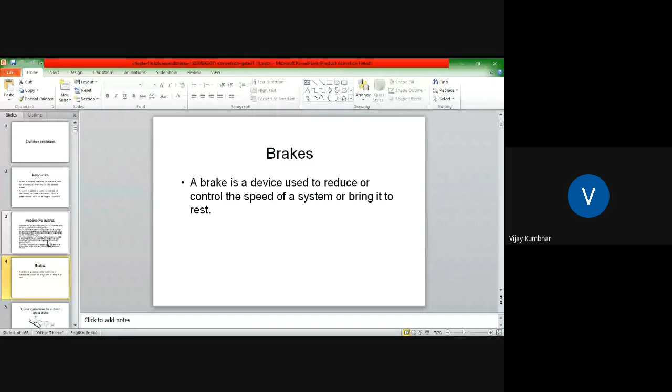As classification of clutches and brakes, they are similar devices providing a frictional, magnetic, or mechanical connection between the two components. If one component rotates and another is fixed to a non-rotating plane of reference, the device will function as a brake. And if both rotate, then it is a clutch. That is the fundamental difference between the clutch and brake we discussed earlier.

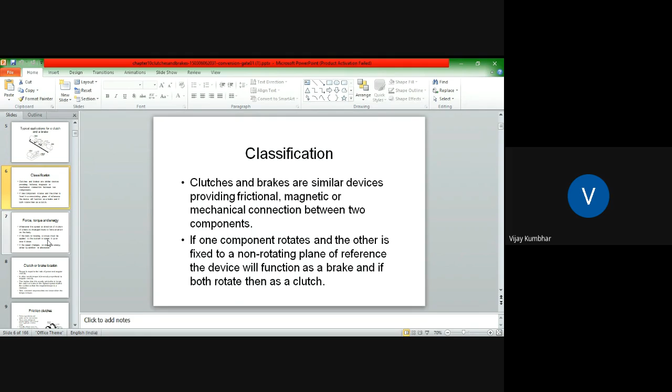At the initial condition, the clutch is always in the engaged position, but in case of brakes, whenever we are going to apply the brakes, then the brake comes into the picture, and at the end of application of the brake, both input and output shafts are stationary. But in case of clutches, whenever they get engaged, input and output shaft both are going to rotate. So this is the fundamental difference between clutch and brake.

Now, what about force, torque, and energy? What exactly do these mean? Because these terms are essential to the design analysis of brakes as well as clutches. So whenever the speed or direction of motion of a body is changed, there is a force exerted on the body, as we studied in Newton's law of motion and the dynamics part of your curriculum.

If the body is rotating, a torque must be applied to the system to speed it up or slow it down. As far as the vehicle is concerned, there is a continuous torque requirement that is continuously varying due to various resistances offered by the road and wheel. With the help of the transmission system, this torque requirement can be fulfilled. The clutch is a very important part of this transmission system, which will transfer whatever torque is developed by the engine towards the rest of the transmission system, and basically towards the wheel, or the contact point between the road wheel and road.

So if the speed changes, so does the energy, either by addition or absorption. With the help of this energy, we can speed up the vehicle, or we can say energy is utilized to change the speed from lower to higher.

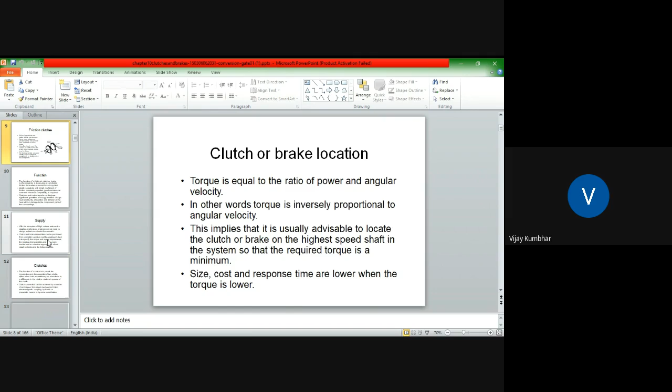We will discuss this in detail in our upcoming slides. Friction type clutches and brakes are the most common, working on the principle of friction, as we discussed earlier: two or more surfaces are pushed together with a normal force to generate a frictional torque.

Normally, at least one of the surfaces is metal, and the other high friction material is referred to as a lining. There are a number of materials that can be utilized as a lining.

The frictional contact can occur radially, as for the cylindrical arrangement, or axially, as a disc arrangement. So these clutches may be single plate, multi plate clutch, or centrifugal clutch. We are going to discuss and see a detailed classification of clutch in the upcoming slide.

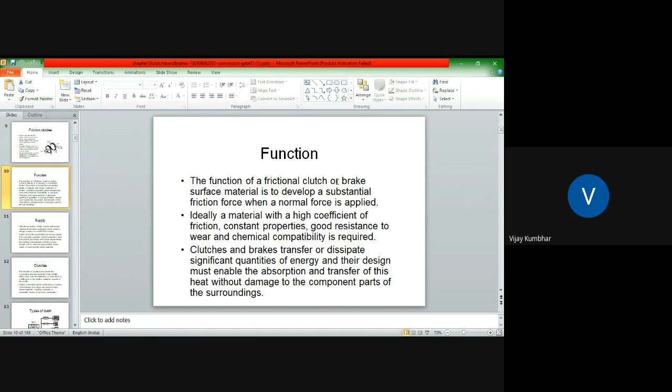Ideally, a material with a high coefficient of friction, constant property, good resistance to wear, and chemical compatibility is required for the proper application of these clutches and brakes. Clutches and brakes transfer or dissipate a significant quantity of energy, and their design must be able to absorb and transfer this heat without damage to the component parts or to the surrounding.

With the exception of high volume automotive clutches and brakes, engineers rarely need to design a clutch or brake from scratch. These engineers or designers have to select the particular clutch or brake as per application requirement, and this requirement depends on the loading characteristics of the system and the inertia. Based on that, they select the appropriately sized clutches and brakes and the proper lining material for the specific application as per requirement.

So the function of a clutch is to permit the connection and disconnection between two shafts, as when there is a relative speed between the input and output shaft.

If you see, during the starting of the vehicle, we brake, clutch, and change the gear, because at the stationary condition of the vehicle, only the engine is rotating. So as to fulfill the initial torque requirement of the vehicle, we have to apply this clutch. It will disengage the gearbox and engine, and whenever we apply the first gear, we slowly release the clutch so as to engage the engine and gearbox again, to transmit the required torque to the wheel.

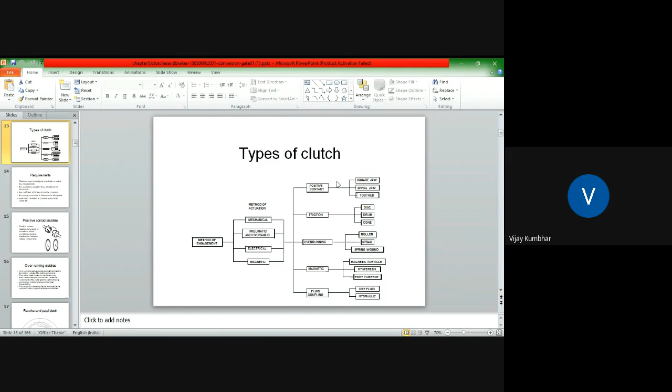So there are certain requirements of clutches. The necessity of actuation force must not be excessive—that is, ease of operation. Then the coefficient of friction should be constant and should not change with heat. As the heat increases, there are chances of reduction of the coefficient of friction, but it should not affect the coefficient of friction.

This property of the clutch is called the anti-fade characteristic of the clutch, so it should possess good anti-fade characteristics. Then the energy converted to heat must be dissipated, and wear must be limited to provide a reasonable clutch life.

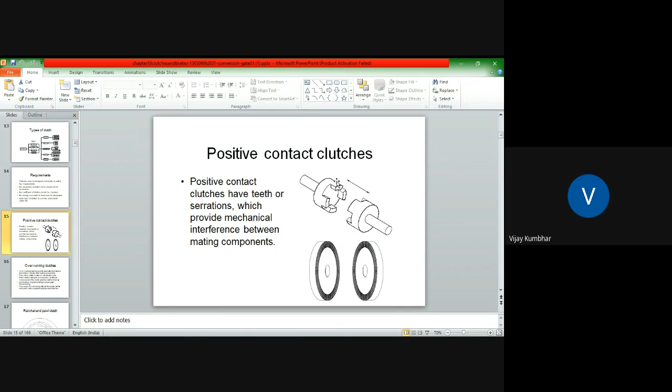Clutches engage at some critical value. Friction elements are forced radially outward to engage against the inner radius of a mating cylindrical drum. Common applications of centrifugal clutches include chainsaws, overload releases, and go-karts.

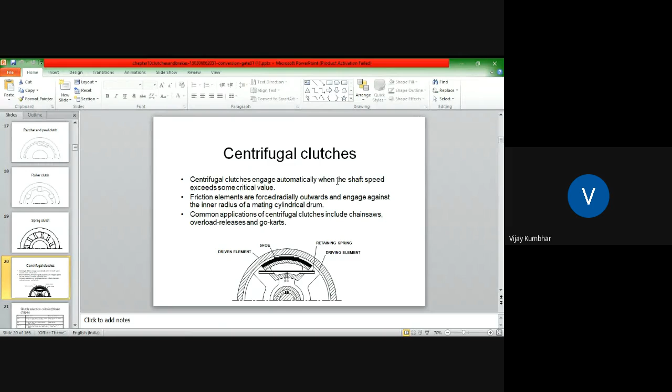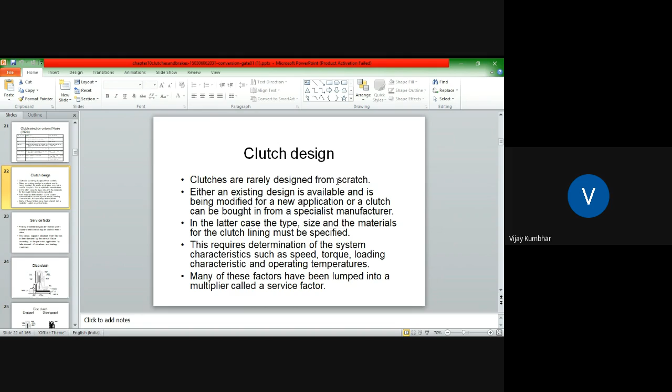And according to this, we consider the service factor, which is nothing but the factor of safety.

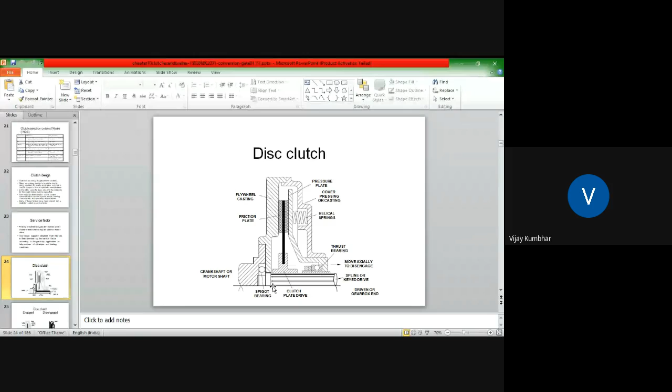There are various types of springs that can be utilized, like diaphragm spring, etc. As per requirement, in case of diaphragm spring, equal pressure can be applied throughout the periphery of this clutch plate. But in case of helical spring, there may be 3 to 4 springs in number as per the size of this clutch unit.

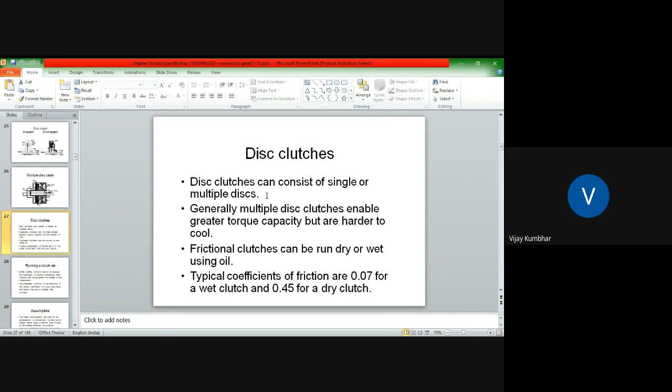These are some certain standard values. While designing, we have to take these values into consideration.

If you see, this is a running clutch wet. While running a wet clutch in oil, it reduces the coefficient of friction, but enhances the heat transfer and potential for cooling of the components. So the expedient solution for this reduction in friction coefficient is to use a number of discs, hence the multiple disc clutches. We have to use a number of friction clutches.

So regarding torque transmission capacity, there are a number of factors on which the torque transmission capacity of this plate depends. That is, effective radius of this frictional disc will be there. Then F, the clamping force, is also an important factor, and the number of frictional surfaces are important parameters which affect the torque transmission capacity.

So while designing the clutch, there are certain assumptions. These assumptions for designing this disc clutch mean generally these clutches can be designed on the basis of two theories: one is the uniform pressure theory and the uniform wear theory. You might have studied this in your machine design course.

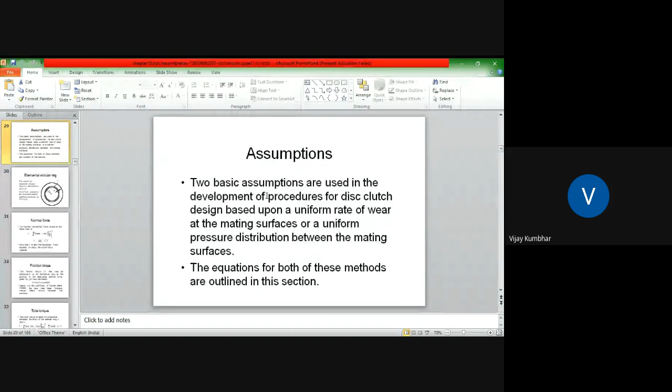So if you see, this is an elemental annular ring. You select a small area of this friction plate having thickness delta r, located at a position of small r from the center point of this friction plate. So the elemental area, this very small annular section we have selected, or annular ring, can be calculated as delta A equals 2 pi r into delta r.

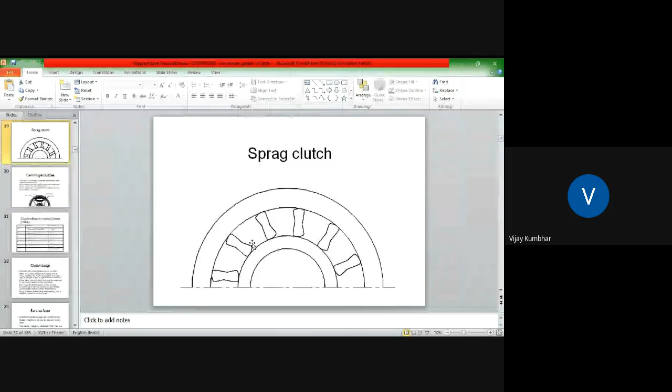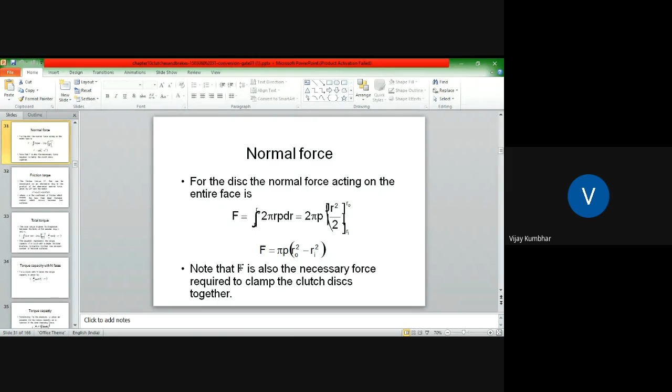So the friction torque delta T that can be developed on the elemental ring is the product of elemental normal force by mu into delta F and the radius. As we know, torque is equal to force into perpendicular distance. So the torque acting on this elemental area or annular ring can be calculated as delta T is equal to R into mu into delta F, which is equal to 2 into mu into pi into r square into P into delta R, where mu is the coefficient of friction which models the less than ideal friction contact which occurs between the two surfaces.

Then this total torque can be calculated by integrating this torque equation from Ri to Ro. So we get the integration of Ri to Ro of 2 pi mu into r square P into dr, which is equal to 2 pi P mu r cube divided by 3, evaluated from Ri to Ro. By simplification, we get 2 divided by 3 pi into P into mu into Ro cube minus Ri cube.

So this equation represents the torque capacity of the clutch for a single frictional surface area. If you increase the number of frictional surface areas, there is an increase in the torque transmission capacity of that particular clutch. So if you see the torque transmission capacity with n number of surfaces, it can be given as T is equal to 2 by 3 into pi P into mu into n into Ro cube minus Ri cube.

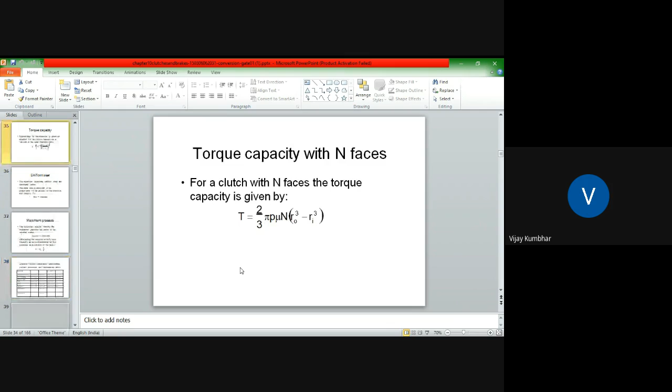Substituting for the pressure P gives an equation for torque capacity as a function of axial clamping force. So capital T is equal to 2 by 3 into mu into F into n into Ro cube minus Ri cube divided by Ro square minus Ri square. This is the common equation utilized to calculate the maximum torque transmission capacity. So the most important parameters are clamping force, internal radius, outer radius, as well as number of frictional surfaces and coefficient of friction between these.

So this is the torque transmission capacity, or the maximum torque transmission capacity that can be calculated from these clutches. As we earlier discussed, these clutches can be designed on the basis of uniform pressure theory and uniform wear theory.

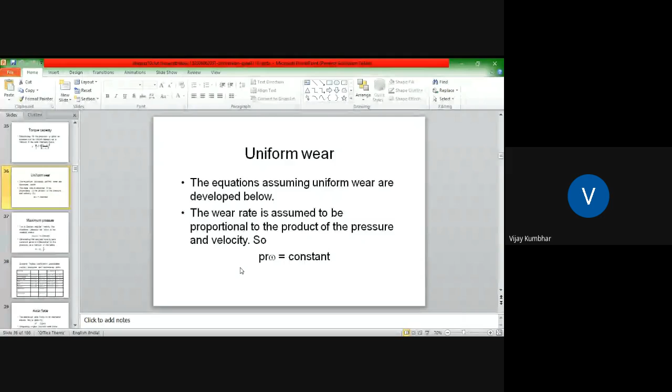So if you see the uniform wear theory, the equations assume uniform wear developed. The wear rate is assumed to be proportional to the product of pressure and velocity, so P into R into R omega is a constant. Again, if you see the maximum pressure for a constant angular velocity, the maximum pressure will occur at the smaller radius, so P max into Ri omega is equal to constant. So eliminating the angular velocity and relating pressure as a function of radius, we get P is equal to P max into Ri upon R.

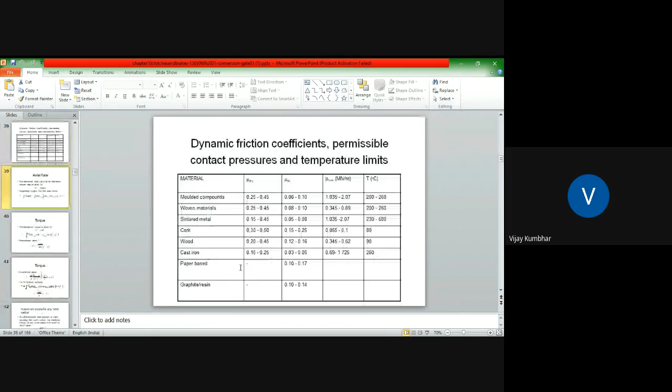Again, axial force can be calculated for uniform wear theory. The delta F is equal to 2 pi into PR into delta R. Again, integrating this equation from Ri to Ro, 2 pi P into RdR. Again, after simplification, we get 2 pi into P max into Ri into Ro minus Ri.

The elemental torque is given by delta T is equal to mu R into delta F. Then capital T, or total torque transmission, is given by integrating 2 pi mu P max Ri R dR from Ri to Ro, which equals P max mu pi into Ri, Ro square minus Ri square.

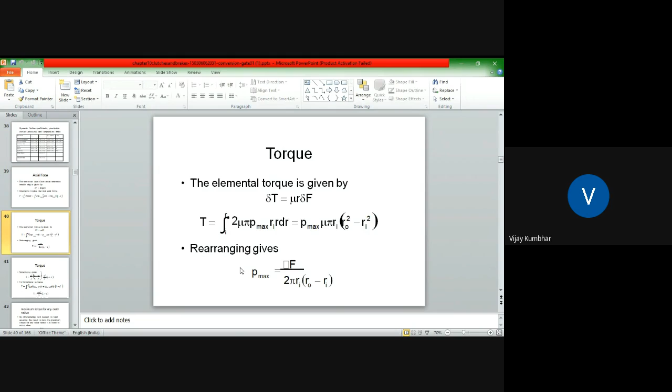By rearranging terms, we get the equation F divided by 2 pi Ri, Ro minus Ri. Substituting this value, capital T is equal to mu F divided by 2 into Ro plus Ri, for number of frictional surfaces.

As the number of frictional surfaces increases, this is based on the wear theory, uniform wear theory. Capital T is equal to mu into Nf divided by 2, Ro plus Ri.

If you see the design equation for maximum torque transmission capacity for both assumptions, uniform pressure theory and uniform wear theory: in case of uniform pressure theory, the transmission capacity can be calculated as 2 by 3 mu into Nf into Ro cube minus Ri cube, divided by Ro square minus Ri square.

And in case of uniform wear theory, capital T is equal to mu into N into F divided by 2, Ro plus Ri.

So the factors affecting this maximum torque transmission capacity of this clutch can be considered as: coefficient of friction mu, N and F, where N is the total number of frictional surfaces and F is the clamping force. Ro is the outer radius and Ri is the internal radius.

So maximum torque for any outer radius - how do we decide the Ri value or Ro value while designing the clutch? By differentiating with respect to Ri and equating the result to zero, the maximum torque for the outer radius Ro is found to be when Ri is equal to root of 1 by 3 Ro. This is a very useful formula, used to set the inner radius when the outer radius is constrained to a particular value. This is a very important parameter while selecting a particular design of this clutch.

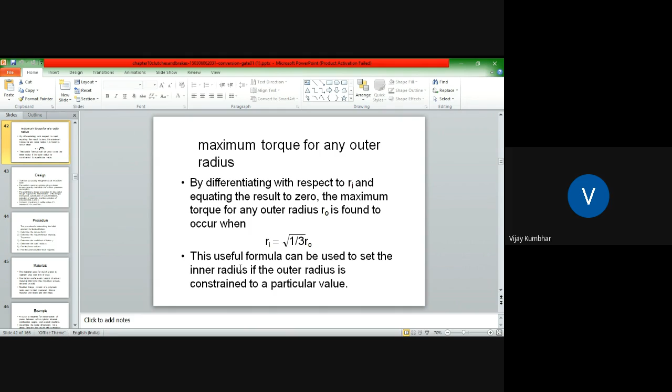If you see, this is the design of a clutch. Clutches are usually designed based on the uniform wear theory. The uniform wear assumption gives a lower torque capacity clutch than the uniform pressure assumption.

So the preliminary design procedure for this clutch design requires determination of torque and speed, specification of space limitations, selection of material, and selection of principal radii Ro and Ri. Common practice is to set the value of Ri in between 0.45 Ro to 0.8 Ro.

After that, there is a procedure to select: first, you have to determine the service factor, then determination of required torque capacity which is equal to power divided by omega, then determination of coefficient of friction, then determine the outer radius Ro and the inner radius Ri, and the axial actuation force required.

So this is the standard procedure through which we can design, or select a particular clutch, or calculate whatever parameters related to the clutch as per the application requirement.

As far as material is concerned, the material used for clutches is typically grey cast iron or steel clutch plate. The friction surfaces consist of a lined material which may be molded, woven, sintered, or solid. Molded lining consists of polymeric resin used to bind fibrous material and brass and zinc chips.

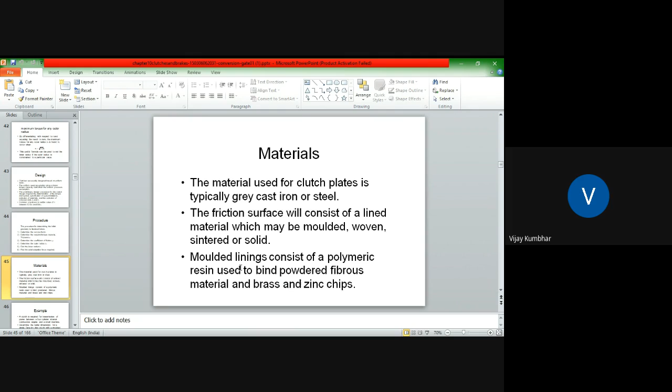Because if you consider the requirement, inertia is the most important component. Thus, to maintain sufficient inertia, the utilization of proper material is very important.

If you see the example of this clutch design: a clutch is required for transmission of power between a four-cylinder internal combustion engine and a small machine. Determine the radial dimension for a single face dry clutch with a molded lining which permits 5 kW power at 1800 rpm. Base the design on the uniform wear theory.

So, on the uniform wear assumption, or on the basis of uniform wear theory, we have to design the clutch, and only a single frictional surface area will be there. You can see this is one input shaft, which comes from the engine, and this is the output shaft, which will go towards this particular machine operation. So the first step is we have to select the service factor.

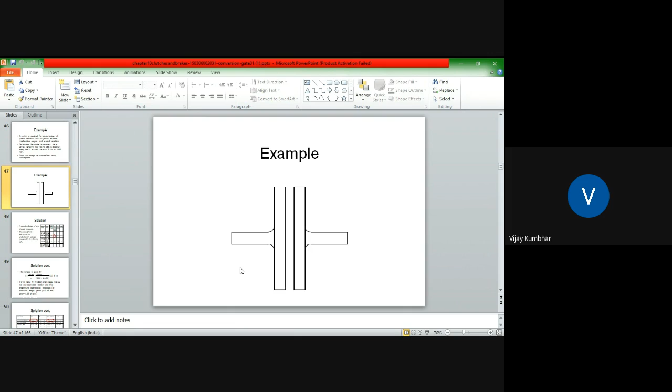From the standard table, we have to select the service factor. A service factor of 2 should be used. The design will therefore be undertaken using a power of 2 into 5 kilowatt, giving 10 kilowatt. There are certain types of reserve strength that can be provided for any design, and we generally select the factor of safety as a reserve strength. So for this, we selected this service factor. The application requirement is 5 kilowatt, but we design by selecting the service factor as about 10 kilowatt.

If you see the solution, the torque transmission can be calculated as power divided by omega. From this equation, we calculated the torque requirement, or the torque we have to transmit, which is about 53 Newton meter.

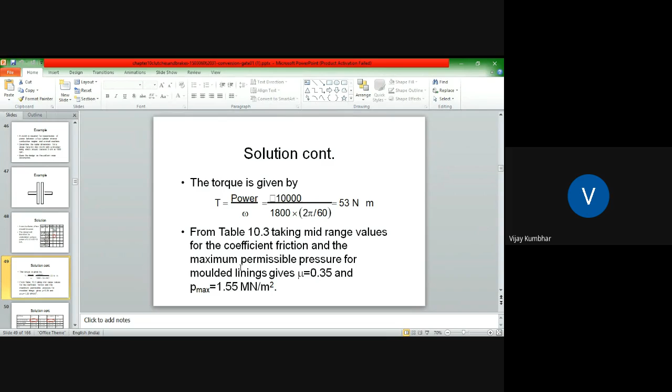From the table where material and provision of friction for dry as well as wet application were shown, we select the material as well as the coefficient of friction. We selected the coefficient of friction mu equal to 0.35, and the maximum applicable pressure P max is about 1.55 meganewton per meter square. You can see this value we selected for this molded component, and this P max is in meganewton per meter square.

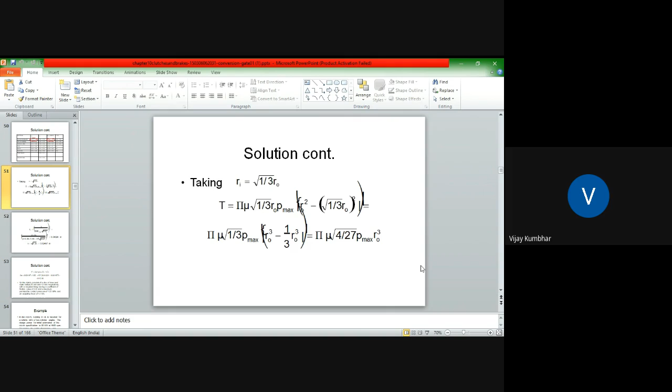The next step is calculation of Ri. As we earlier saw, for this particular value we get the maximum torque transmission capacity. Ri can be calculated as the under root of 1 by 3 into Ro. From this we can write capital T equal to pi into mu into square root of 1 by 3 Ro, P max into Ro square minus 1 by 3 Ro bracket square. This can be written as pi into mu into square root of 1 by 3 P max Ro cube minus 1 by 3 Ro cube, which equals pi into mu into 4 by 27 P max Ro cube. After simplification of this equation, we get the value of Ri equal to 0.024997.

Then we have to calculate the clamping force, F equal to 2 pi n Ri P max into Ro minus Ri. So in that, this clamping force is about 4,443 Newton.

So the clutch consists of a disc of inner and outer radius of 25 and 43 mm respectively, with a molded lining having coefficient of friction about 0.35, and a maximum permissible contact pressure of about 1.55 MPa, and the actuating force is 4.4 kilonewton. This is the simple example by which this clutch can be designed, showing the procedure and steps we have to follow for the design of any clutch.

First we have to select the service factor, and according to the service factor, we select the material for the friction lining, as well as the coefficient of friction and the P max for this particular application. After that, we calculate the value of Ri from the standard equation, Ri equal to square root of 1 by 3 into Ro. Then we calculate the value of Ri and Ro, and after that the clamping force, inner and outer radius. This is the standard procedure or steps that can be followed to design any clutch.

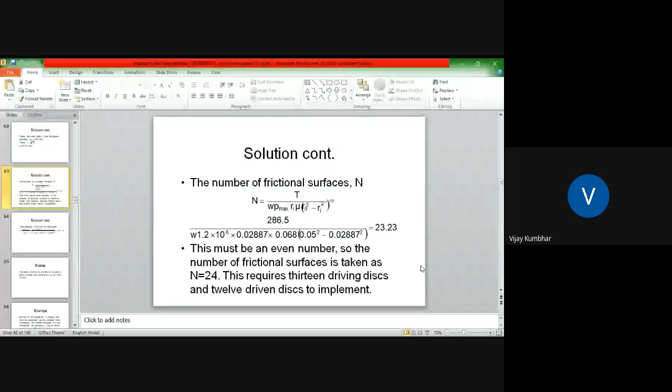If you see the brakes, the basic function of brake is to absorb the kinetic energy and dissipate it in the form of heat. The function of brake is to completely stop the vehicle or machine, or reduce the speed of that particular machine. In the case of automotive or vehicle, we have to maintain the position of the vehicle when it is in the parking condition, or when the vehicle is going to park. At that time, the brake has to maintain the position with the help of the parking brake, or handbrake.

If you see the example, an idea of the magnitude of energy that must be dissipated can be obtained by considering the familiar example of a car undergoing an emergency stop in 7 seconds from 60 miles per hour, that is 96 kilometers per hour. So, as far as the solution is concerned...

The car mass can be considered as 1,400 kg, and assuming 65% of car weight is loaded onto the front axle during rapid braking, then the load on the front axle can be calculated as 1400 into 9.81 into 0.65.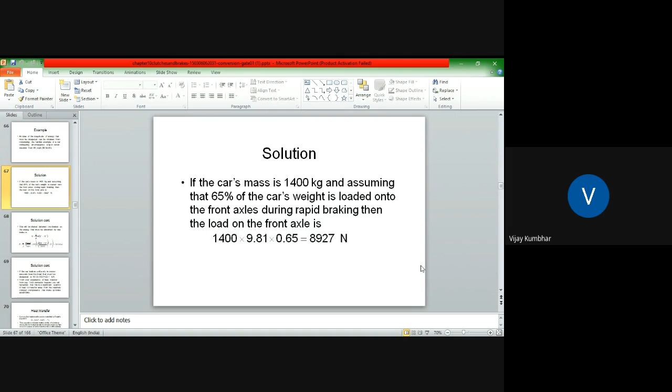So the loading after braking on the front axle is calculated as 8927 Newton. The two brakes will share this load. The energy that must be absorbed by one brake can be calculated as E equals 1 by 2 into M into V1 square minus Vf square. Putting in these values, we get E equals 161.8 kilojoule.

If the car brakes uniformly in 7 seconds, then the heat that must be dissipated can be calculated as 161.8 into 10 cubed by 7, which is equal to 23.1 kilowatt. From your experience of heat transfer, say a 1 kilowatt domestic heater, you will recognize that this is a significant quantity of heat transfer away from the relatively compact components that make up the brake assembly.

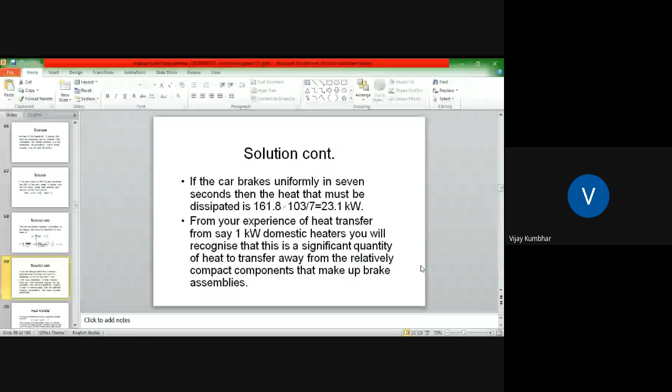If you see the classification or types of brakes, according to methods of engagement: mechanical, pneumatic and hydraulic brake, electrical brake, automatic brake. Then friction brakes: drum brakes, disc brakes. In drum brakes, there are short shoes, long shoes, band brake. In case of disc brake, caliper disc, full disc. Then magnetic, which can be electrically on or electrically off. These are certain types of brakes.

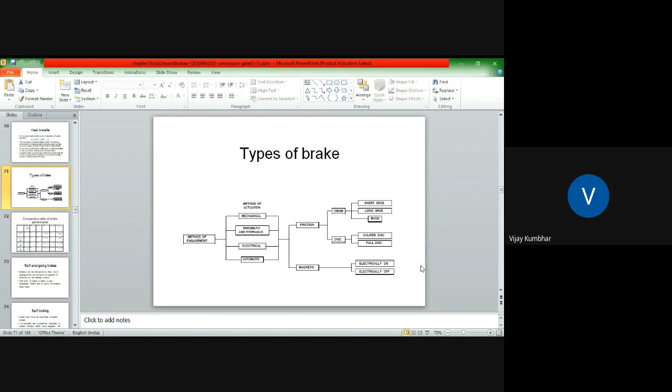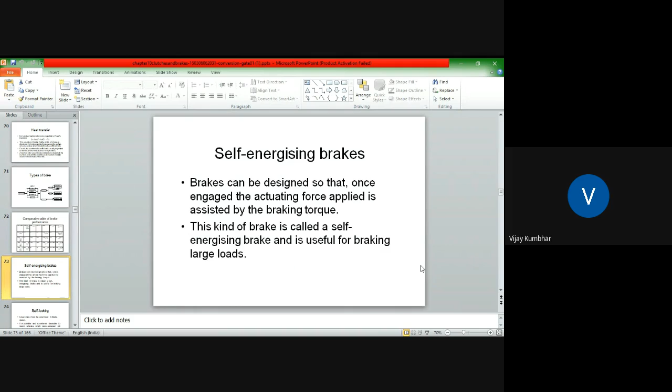This self-energizing brake can be designed so that once engaged, the actuating force applied is assisted by the braking torque. This kind of brake is called a self-energizing brake and is useful for braking large loads. Another type is self-locking, so great care must be exercised in the brake design. It is possible, and sometimes desirable, to design a brake in which once engaged, it will grab and lock up. This is called self-locking.

So this is the torque transmission capacity. Capital T is equal to mu into F into Re, where Re is the effective radius, and you can see theta is there. Circular pad and annular pad is there. So clamping force is capital F, and according to size of this.

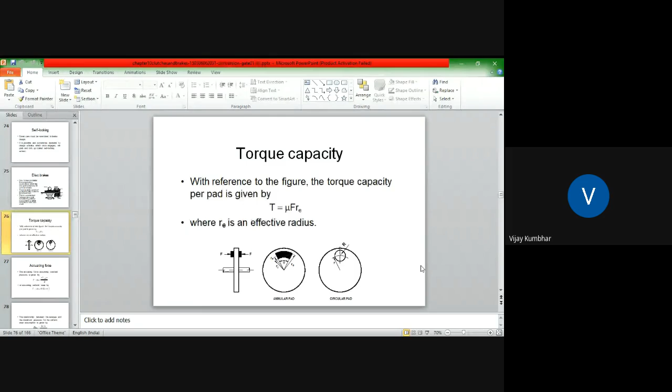The relationship between the average and maximum pressure for the uniform wear assumption is given by P average divided by P max is equal to 2 Ri divided by Rho, divided by 1 plus Ri upon Rho.

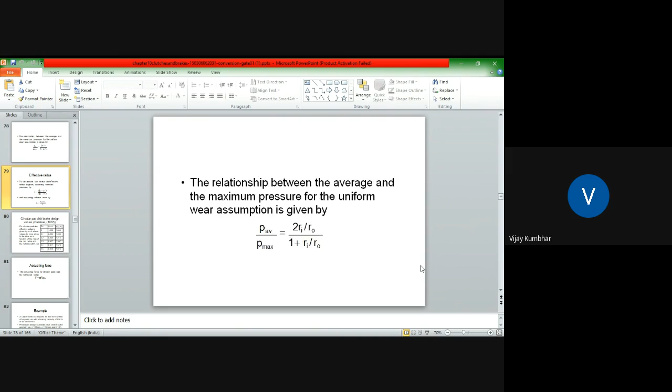So circular pad disc brake design values, you can see this is some standard values that can be utilized for the designing of the brakes. For circular pad, the effective radius is given by Re is equal to R into delta, where the values of delta are given in the table as a function of ratio of pad radius as well as radial location, that is capital R to small r.

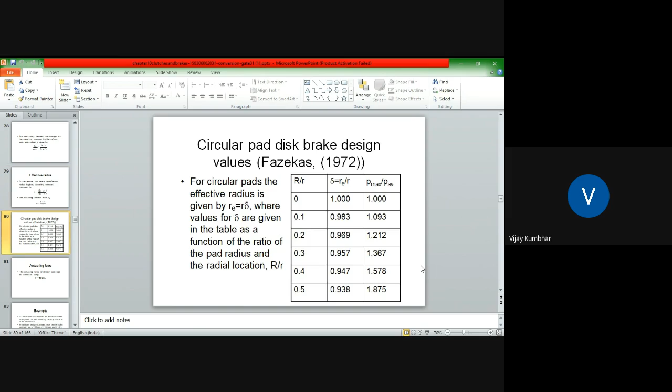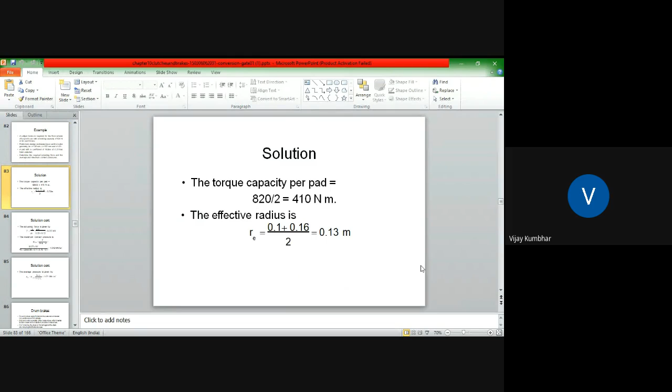And effective radius can be calculated by using this uniform wear theory. This Re effective radius is the average of these two radii, that is Ri and Ro. So this can be calculated as 0.1 plus 0.16 divided by 2, is equal to 0.13 meter.

So the actuating force is given by capital F is equal to capital T divided by mu into Re. So this will be 9.002 kilonewton. Maximum contact pressure can be calculated for this particular example as 1.912 meganewton per meter square.

So the average pressure can be calculated as P average is equal to P max into 2 Ri divided by Rho, divided by 1 plus Ri divided by Rho. It can be 1.471 meganewton per meter square. So this is the design process for simple design of this caliper.

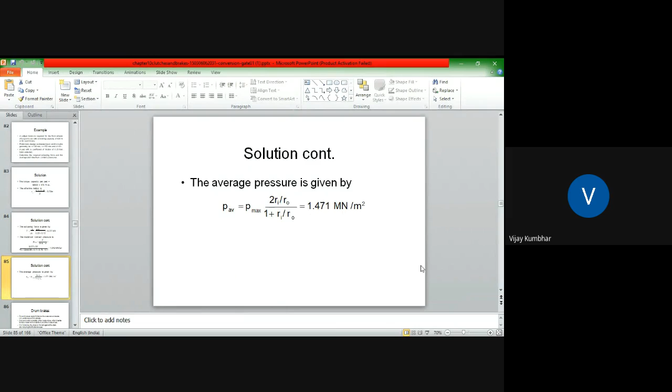I'm not going to discuss all the examples of the design of all types of brakes, but just brush up the things related to other types of brakes also, like drum brake. You can see this is the drum brake. Drum brake applies friction to the external or internal circumference of the cylinder.

These brakes are generally internal expanding brakes. So the drum brakes consist of the brake shoe which has the friction material bonded to it, and the brake drum. So the brake shoe is forced against the drum, developing the friction torque.

Drum brakes can be divided into two groups depending on whether the brake shoe is external or internal to the drum. Further classification can be made in terms of length of brake shoe: short, long, and complete band.

Then short and long shoe internal drum brakes. Short shoe internal brakes are used for centrifugal brakes that engage at a particular critical speed. Long shoe internal brakes are used principally in automotive applications.

If you see the calipers used in case of any vehicle, this drum brake, or you can say internal expanding brake, the arc of contact between the brakes wholly covers the drum, and there will be two calipers.

So drum brakes can be designed to be self-energizing. The actuating force can be assisted by this braking torque in case of these self-energizing brakes. Once engaged, the friction force increases and normal force non-linearly, so the increase in friction torque has a positive impact.

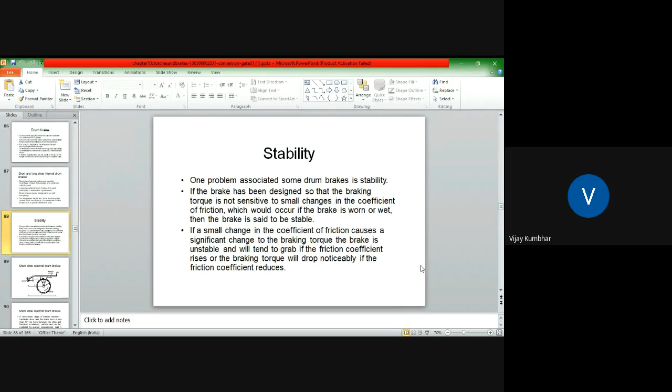As the friction material is considered, if there is an increase in heat, there is a change in the coefficient of friction, so it must possess anti-fade characteristics like in clutches as well as brakes. If a small change in the coefficient of friction causes a significant change in braking torque, the brake can be unstable and will tend to grab as friction coefficient rises, or the braking torque will drop noticeably if the friction coefficient reduces. So stability is the most important part of this braking system.

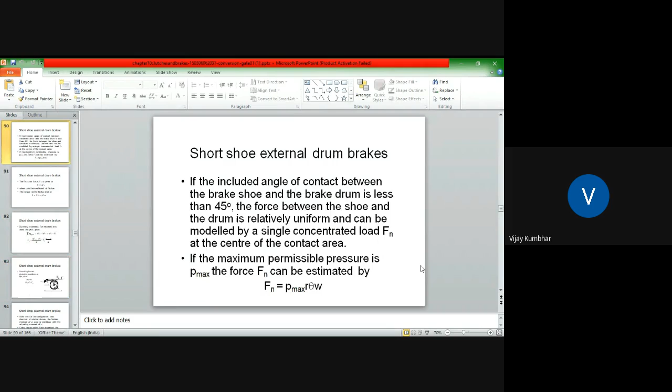Then the frictional force can be calculated as Ff equals mu into Fn, and then the torque can be calculated as Ff into R, that is mu into Fn into R.

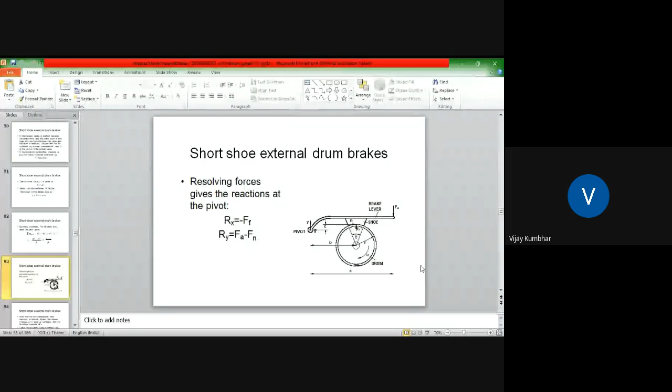In case of this short external drum brake with the pivot, if you calculate the moments or reactions, we get Rx equals minus Ff, and Ry equals Fa minus Fn.

One important thing is that depending on the configuration and direction of rotation, mu Fn C adds or combines with the actuating force A into Fa. Once the actuating force is applied, the friction generated at the shoe acts to increase the torque. This kind of braking action is called self-energizing.

So for short shoe external drum brakes, if the brake direction is reversed, the friction moment mu Fn into C becomes negative, and the applied force Fa must be maintained to generate a braking torque. This combination is called self de-energizing.

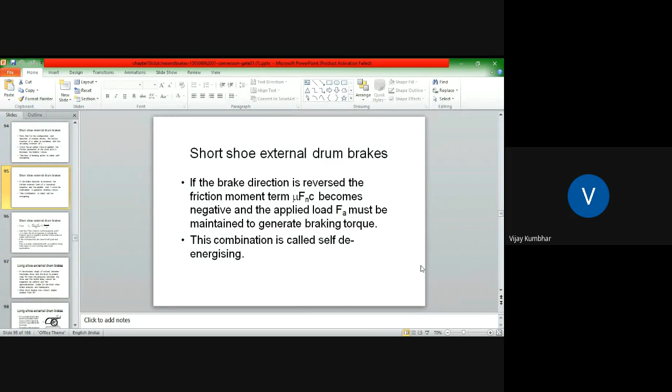If the brake is self-energizing and mu C is greater than B, then the force required to actuate the brake is zero or negative, and the brake action is called self-locking. If the shoe touches the drum, it will grab and lock. This is usually undesirable, with the exception of hot stops and overrunning clutch type applications.

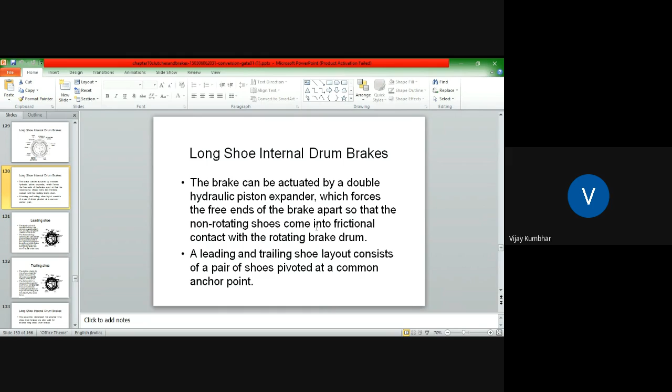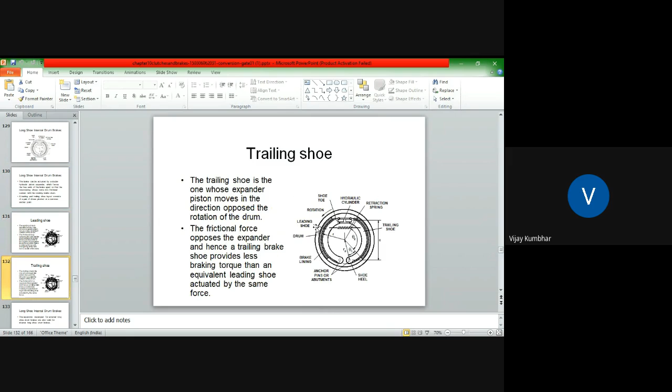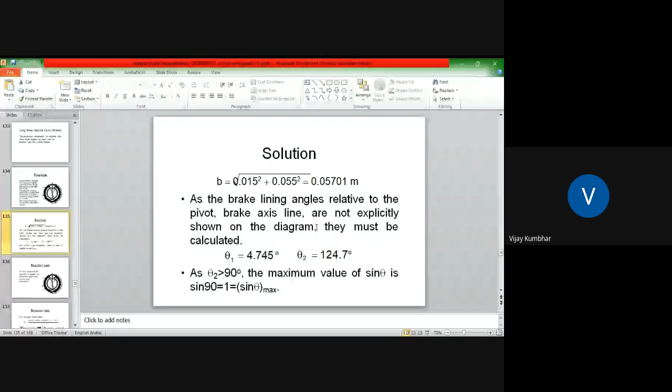As the angles the brake axis are not explicitly shown, first calculated, and theta 2 is 124.7 degree. As theta 2 is greater than 90 degree, the maximum value of sin theta is 1. Sin 90 is equal to 1.

Then from this equation we calculate the actuating force F is equal to Mn minus Mf divided by A. This is 938.9.

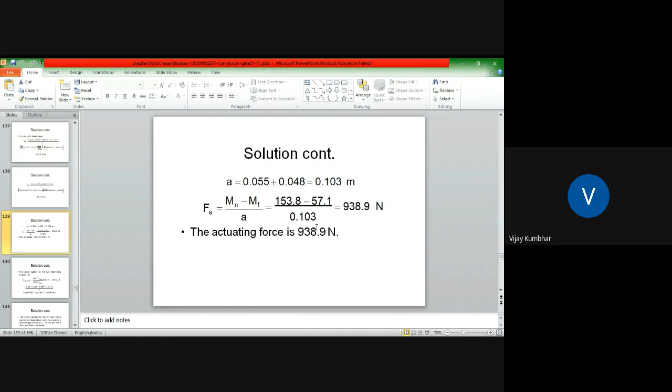Then torque applied by the right hand shoe is given by T right shoe equal to mu into W R square P max divided by sin theta into cos theta 1 minus cos theta 2. After calculation, we get the value of T right shoe equal to 69.54.

And the torque applied by the left hand shoe cannot be determined until the maximum operating pressure P max for the left hand shoes has been calculated.

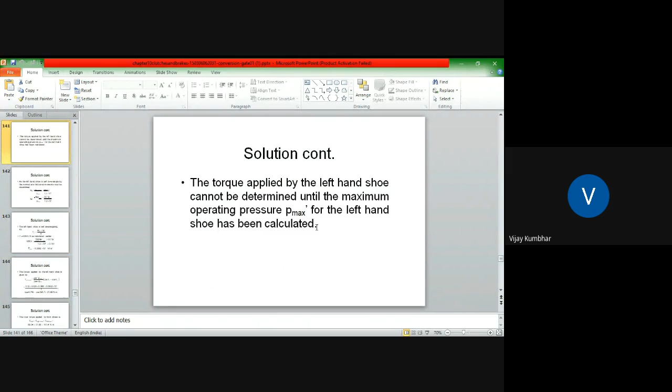So for this left hand, you can see the value of Mn and Mf. And after that, the value of Fa, the actuating force, can be calculated as 938.9. So after simplification, we can calculate the value of P max is equal to 0.5502.

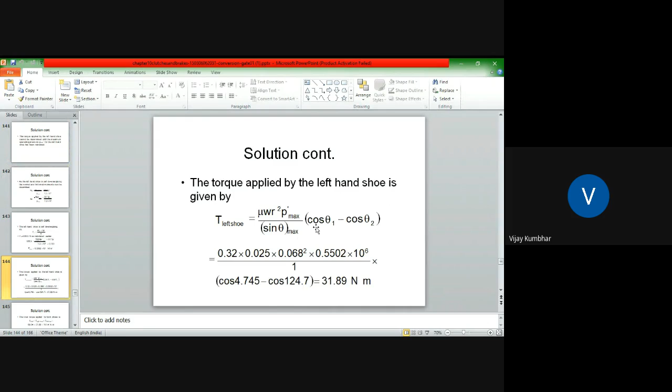And torque transmitted by this left shoe can be calculated with the help of this equation, mu into W into R square P max divided by sin theta max into cos theta 1 minus cos theta 2, and it can be calculated as 31.89 Newton meter.

So total torque applied, T total is equal to T right shoe plus T left shoe, and this is 101.4 Newton meter.

If you see again this band brake, one of the simplest type of braking device is band brake. This consists of a flexible metal band lined with friction material wrapped partly around the drum. The brake is actuated by pulling the band against the drum. This is the band brake.

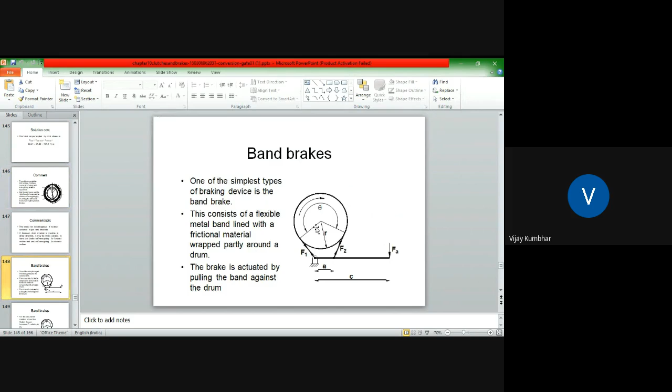This discussion has concentrated on rotating clutches and brakes and specifically on the design of friction-based devices. Again, detailed design of clutch braking system involves the integration of a wide range of skills such as bearing, shaft, splines, teeth, flywheel, casings, frictional surfaces, hydraulics, sensors, and control algorithms.

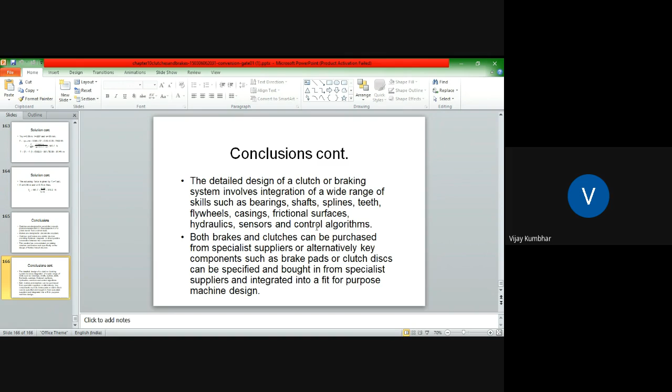Both the brakes and clutches can be purchased from specialist suppliers, or alternatively key components such as the brake pads or clutch discs can be specified and bought in from specialist suppliers and integrated into the fit-for-purpose machine design. So this is what about the clutch and brake design.

So the common working principle of this clutch as well as brakes is friction. Working principle is friction, or we can say both of these work on the principle of friction.

Now we are moving towards the bearing part, the next part is bearing.

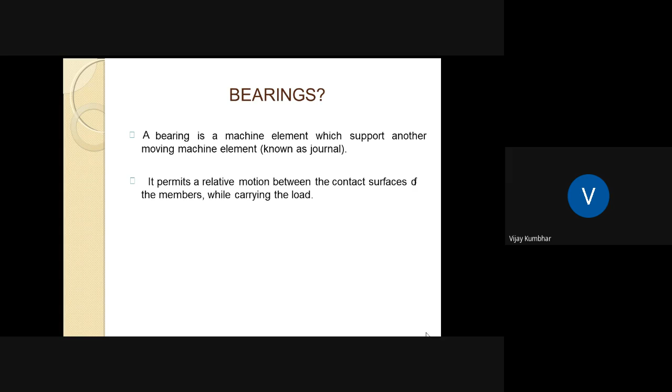What is a bearing? A bearing is a machine element which supports another moving machine element, called a journal. It permits relative motion between the contact surfaces of the members while carrying load. I'm not going to discuss too much because you might already be aware of these things from machine design.

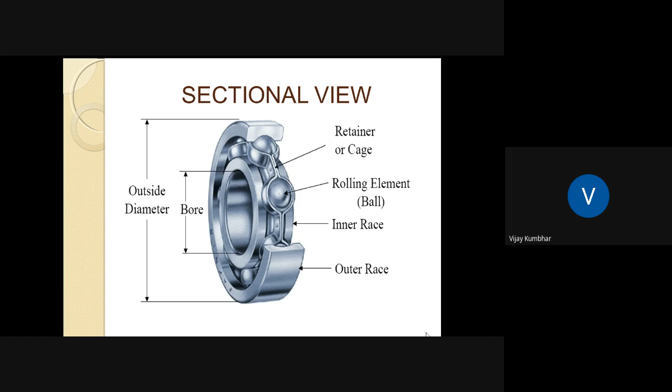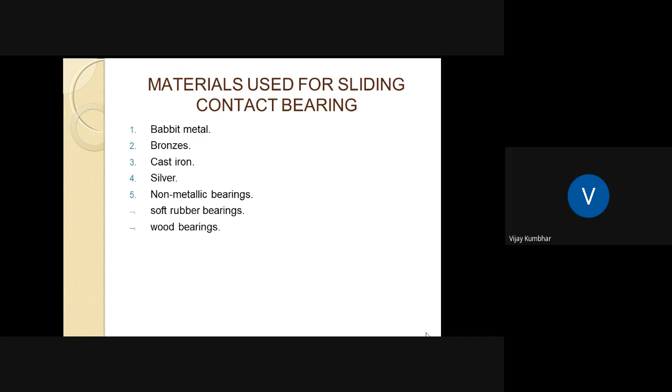The properties of sliding contact bearing materials are compressive strength, fatigue strength, conformability, embeddability, bondability, corrosion resistance, thermal conductivity, and thermal expansion. As for materials, there are babbitt metal, bronzes, cast iron, silver, non-metallic materials, soft rubber bearings, wood bearings. This is the material and their properties.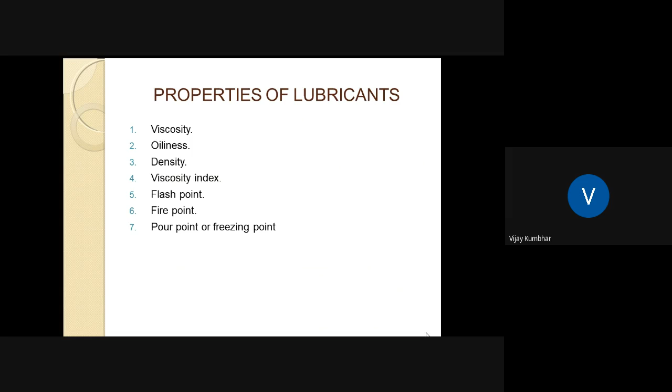As for properties of lubricant: viscosity, oiliness, density, viscosity index, flash point, fire point, then pour point or freezing point.

Lubricants utilized for bearings are liquid oil, semi-liquid greases, and solid. As a classification, bearings are radial bearing and thrust bearing. Again, depending upon the nature of contact, sliding contact and rolling contact bearing.

These are types of bearings: plain bearing, rolling element or anti-friction bearing. On the basis of area of contact: journal bearing, guide bearing, thrust bearing or tilting pad, axial load. Again, journal bearing can be classified as solid, split bearing, half bearing, tilting pad, cylinder, and rider ring, etc.

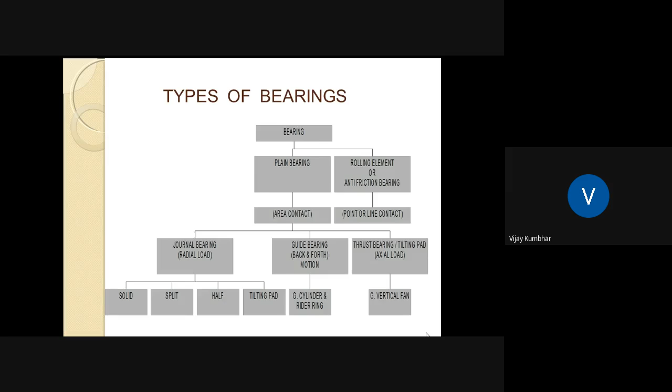If you see this, there is point contact and line contact. In case of point contact: less area of contact, less friction, more speed and less load. In case of line contact: more area of contact, more friction, less speed and more load.

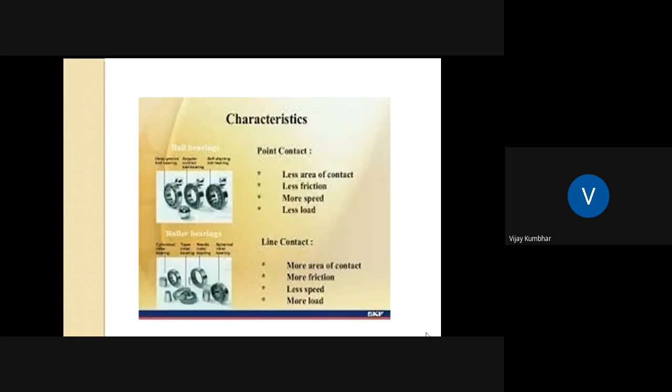Plain bearings are also called bushing, journal bearing, sleeve bearing, or rifle bearing. As for anti-friction bearings: ball bearing, radial ball bearing, angular contact ball bearing, roller bearing, cylindrical roller bearing, taper roller bearing, spherical roller bearing, needle roller bearing. Then forces acting on the bearing: axial and radial load, and a combination of both axial and radial.

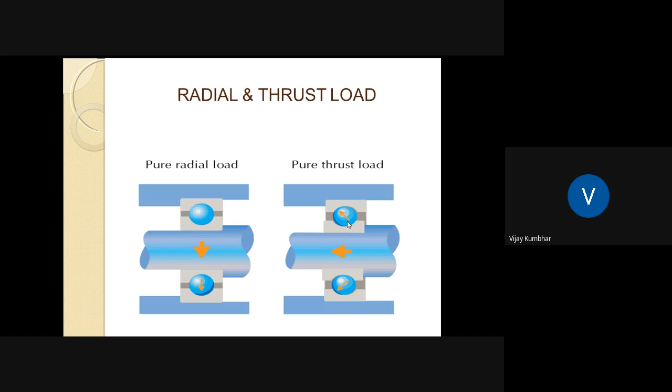In case of pure radial load, and if you see this is a thrust load, part of the load can be taken by this ball, and this part of the load can be taken radially.

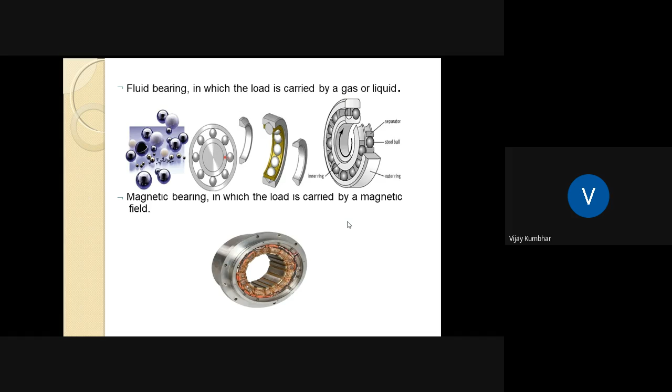Some more types: a jewel bearing in which the load is carried by rolling the axle slightly off center. Fluid bearing in which the load is carried by gas or liquid. Magnetic bearing in which the load is carried by a magnetic field. Flexure bearing in which the motion is supported by the load element which bends.

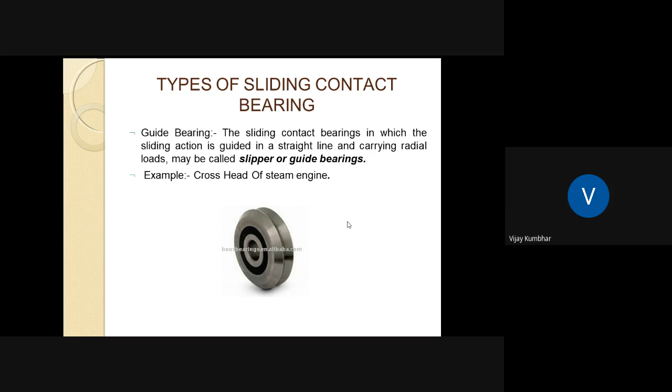If you see the types of sliding contact bearings, there is guide bearing, a sliding contact bearing in which the slide action is guided in a straight line and carries radial loads, may be called a slipper or guide bearing. Example: the cross head of a steam engine.

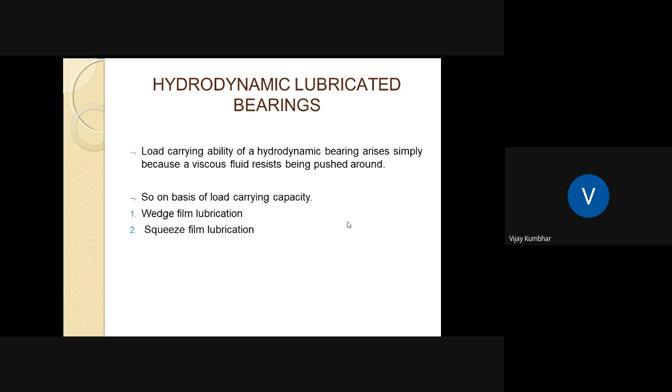In certain cases, the bearing oscillates or rotates so slowly that the oil film cannot provide satisfactory film thickness. If the load is uniform or varying in magnitude while acting in a constant direction, this becomes a thin film or possibly zero film problem. But if the load reverses its direction, the squeeze film may develop sufficient capacity to carry the dynamic loads without contact between the journal and the bearing. Such a bearing is called a squeeze film bearing.

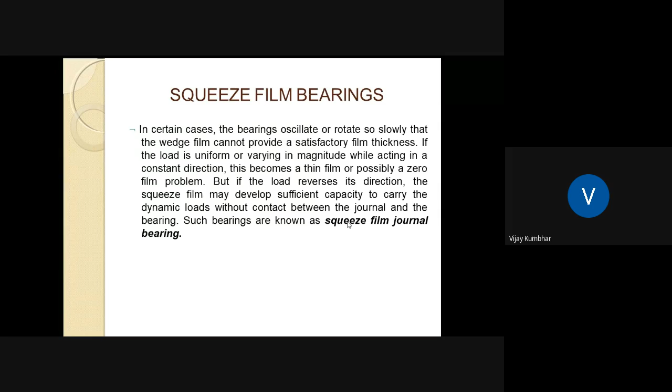It can be a bearing of the same size, and you might be aware about the rated life of the bearing. L10 life is the life at which 10% of bearings being tested would fail before the rated number of revolutions of the inner race at the rated speed.

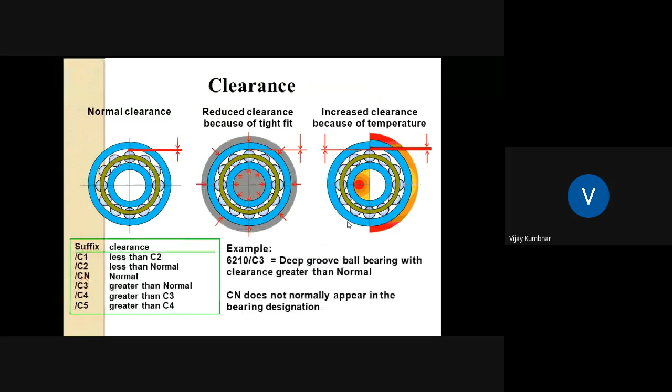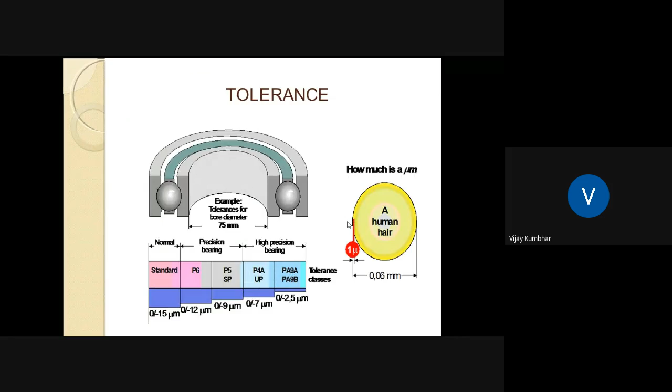For the design consideration of these bearings, first we determine the ratio L by D. Then check the bearing pressure, which is near about W divided by L into D. Then assume the lubricant forms a stable operating temperature T0. This temperature should be between 26.5 degrees Celsius and 60 degrees, with 82 degrees Celsius as the maximum for high temperature installations such as steam turbines.

Then assume the clearance ratio C by D from the table. Then determine the coefficient of friction by using the relation mu equals 33 divided by 10 raised to 8, times Zn divided by P into D by C, plus K.

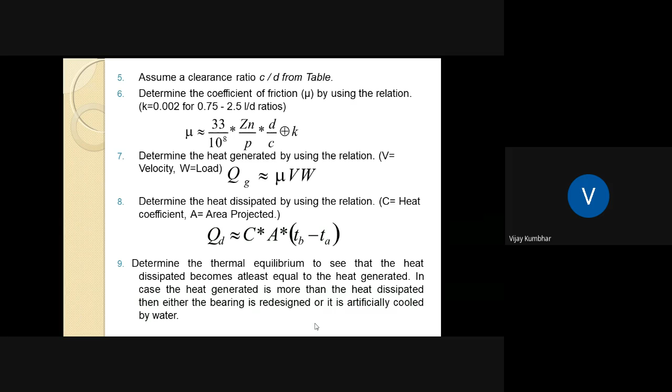Determine the heat generated using the relation Qg is nearly about mu into V into W. Then determine the heat dissipation using the relation Qd equals C into A into Tb minus Ta. Then determine thermal equilibrium to see that the heat dissipated becomes at least equal to the heat generated. In case the heat generated is more than the heat dissipated, then either the bearing is redesigned or artificially cooled by water.

The temperature of the bearing is approximately midway between the temperature of the atmosphere and the temperature of the oil. That can be calculated as Tb minus Ta is nearly about 1 by 2 into T0 minus Ta.

For a well-designed bearing, the temperature of the oil film should not be more than 60 degrees. Otherwise, the viscosity of oil decreases rapidly, and the operation of the bearing is found to suffer. So the temperature of this oil film is often called the operating temperature of the bearing.

In case the temperature of the oil film is higher, the bearing is cooled by circulating water through coils within the bearing. The mass of oil needed to remove the heat generated at the bearing may be obtained by equating the heat generated to the heat taken away by the oil.

M is the mass of oil, S is the specific heat of oil, and delta T is the temperature difference between inlet and outlet temperature of oil. This can be calculated as Q equals M S into delta T.